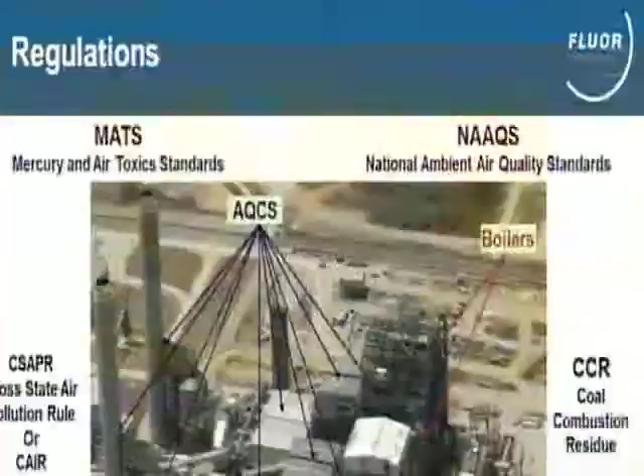I've spent 32 years in air quality control systems development. In a way, it reminds me of Lord of the Rings. We've started down a path that started more than 40 years ago, before the Clean Air Act, and we've had our first major battle with SO2, and we've done a lot of work on sulfur dioxide to take it from old units that used to work on multiple small 100-megawatt plants to now 800-megawatt plants that handle the flue gas from 3 boilers, and the technology's grown. The second big battle was NOx on the large units that we've tackled, and China is just beginning to work on. England's trying to do SCRs, but they can't find the money. And our next great battle, I guess, is air toxics, and that's a part of my talk today. I won't mention who the evil one is, but there may or may not be one in this case.

This is a power plant that was built and has been in operation in Texas for about 5 years. It was permitted at that time, and that power plant, of course, could not meet the MATS limits today for mercury and particulate. That's one of the challenges we have when we start going into the technologies.

I really want to focus on new plants in my discussions here. But if you talk about a new plant and all the regulations, of course CSAPR has come and disappeared like a ghost would. Coal combustion residue is not necessarily an issue on a new plant because you would design the plant for that potential. Same with 316B - you would design your plant for that, so it would not be an issue on a new plant. But things like continuous improvement under national ambient air quality standards, greenhouse gas, and MATS certainly are issues.

For those of you who don't go to Texas to look at power plants, I just wanted to show you, these little things here are turbines - that's what makes electricity. These medium-sized things here are boilers, and everything else from here back is air quality control systems. This plant is equipped with mercury control, large bag houses, SCRs, and 80-foot diameter wet scrubbers, about 140 feet tall. So somewhere over here, I think that's a truck. This is 2x800, a very large plant. It's a reference, maybe a perspective that everybody doesn't get every day.

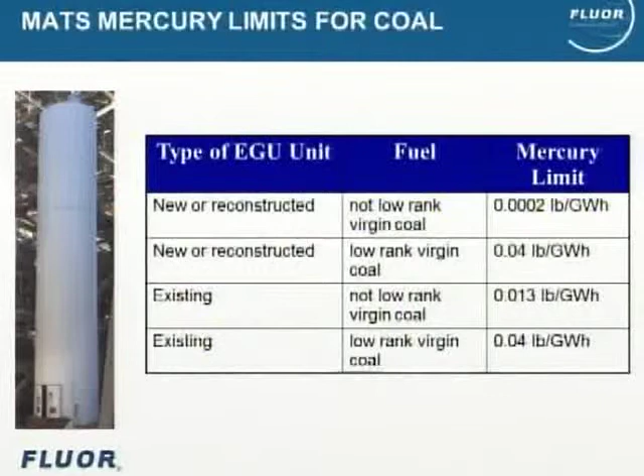We heard some very good talks about mercury, and we know that the limits for mercury on new plants are being revised. Those of us like me who have worked on some of the transition plants under the greenhouse gas laws - I testified under permit hearings, and it's quite an interesting process - but these limits are really a big challenge. For new or reconstructed units, I'm hoping the new limits are at least measurable, and can't wait to get those in the next few weeks, I guess, months. Maybe it's by February or March, I guess those limits will be published.

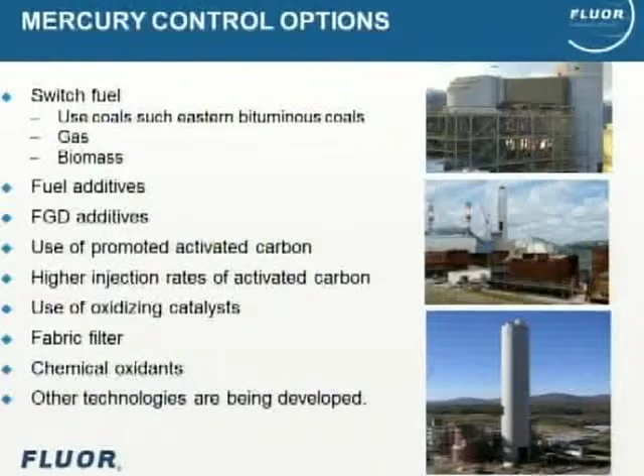We also heard a lot of things about mercury control options, and I don't know that I need to go into a lot more detail on that, but if you are building a new plant and you're meeting a limit that's anywhere close to where the MATS limits are today, you've got to do everything. I can't imagine that there's any way, because you're looking at 99.7% capture or something of that magnitude. And I think Forrest Gump's mother would say Mercury is as Mercury does, because it's a challenge.

We saw a very good presentation from Southern Company yesterday, and the similar sources that's in the regulation under MATS at their sites are not even similar sources. So to predict it, measure it, and guarantee it, you've got to do everything within the process. You've got to understand every variable - from gas temperature, the effects of SO3, the effect of NOx capture and ammonia, the removal, re-entrainment - every step of the way in the process.

And you've got to do that for every fuel that you may burn or that might show up one day, because of the variability of mercury in the fuel, the variability of halogens in the fuels - all things that are very important from a design standpoint. And when you're doing emission limits for mercury, we've gone as low as you can go. You can't get under that bar, especially when you consider startup, shutdown, transients, and all the issues involved with operation of a new plant.

Similar is the particulate control issue. Again, the bar is set very, very low. We do expect those limits to come up to be a little bit more reasonable.

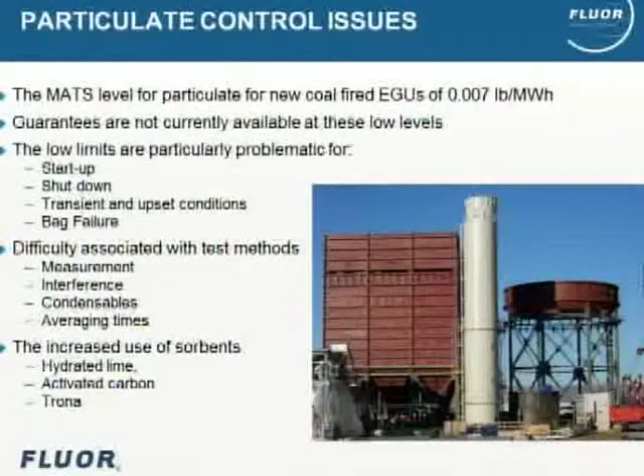And there's a bit of good news, I think, in the particulate control arena - people who sell bag houses feel like they can get to those limits under MATS, but they can't guarantee it. I can get there, but I can't guarantee it, because I don't know what's going to happen when a bag's going to tear, what's going to happen in the operation, what's going to happen with fuel variability.

What's going to happen with activated carbon injection and sorbent injection for SO3 controls. But from a conceptual standpoint, they can get down there, they could probably test it that way. But can you operate it at that really low level for a long period of time? That's certainly the challenge, and one of the major challenges for particulate control if and when new units are built.

And I think we could all debate what's going to be the future of new coal. But I would say that coal is a fuel that's going to be in our energy mix for a long period of time. A program to phase out old coal units and replace them with new coal units makes sense to me - maybe doesn't make sense to other people - but certainly near MATS limits and higher efficiencies, newer plants does make a lot of sense.

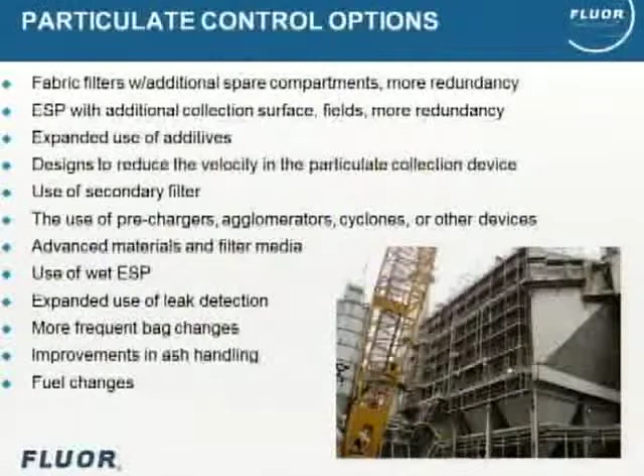Again, like in mercury, the options for particulate control at these really low levels includes doing everything and understanding the entire impact from combustion or selection of your fuel, your coal ash mix, the type of fuels, all the way through to the stack. And some of the new units that are permitted, that are transition units - even though the MATS limit says that wet ESP is too expensive - that's most likely part of the process to make sure that you can meet a particulate limit that is as low as these are under MATS today.

Switching tracks a little bit, there's been a lot of interest in control of HCl, and it's also part of MATS, or SO2 as a surrogate under MATS. And I just did a calculation that I wanted to share with you - it's a fairly straightforward calculation to look at the relevant reagent costs for control of SO2 and HCl using various reagents.

Limestone being a wet scrubber reagent, dry lime in a circulating dry scrubber or a wet scrubber, and then dry sorbent injection where you choose hydrated lime, trona, or even sodium bicarbonate. And the reason I did this calculation is because a lot of people say, well, this makes sense - I can control HCl or I can control SO2, and there's some pretty high removal efficiencies if you inject enough of this stuff in the gas path. But just from a reality check, look at what it costs you per ton of SO2. I've made assumptions on stoichiometries and the initial costs of the reagents.

A wet FGD, if you buy limestone at $15 a ton, costs about $25 per ton for SO2 removal. And as you go up for a dry FGD, circulating dry scrubbers, you're in the $63 to $137 a ton range. And dry sorbent injection, because you use a more reactive, more expensive material, can range from $158 to $994 a ton. This is just a snapshot of what happens for reagent costs.

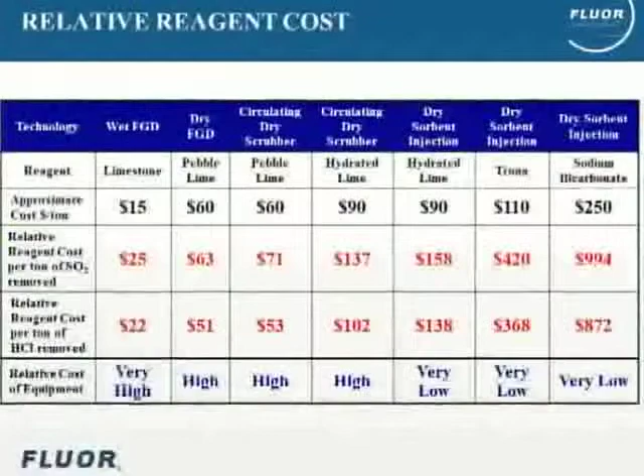Again, when you use these reagents, you've got to consider the impact of not only removing the acid gas, but what it does to the fly ash, what it does to the ESP if you have one, because it certainly will change the resistivity of the ash and the performance of an ESP, what happens in the fabric filter, and how removing these species might impact mercury control using activated carbon or other chemical additives. So it's very complicated, but this is just an example of the reagent costs, and I thought it would be of interest to this audience.

Measurement - I don't think I'll spend a lot of time on this, but most of us that work in this industry know that it's really difficult to measure some species. Mercury, if you take an uncontrolled unit, 800 megawatts, using a Powder River Basin coal, would emit about 1 pound of mercury a day. So you're going to control that to 99.7% and capture all that, and it's below the detection limit of reasonable methods.

Actually, HCl is the worst of the ones. The limits on HCl are below the detection limits, but mercury is really tough at the low concentrations. Particulate is really tough at the low concentration. It means longer averaging times, longer testing times. So it creates one of the challenges for the industry.

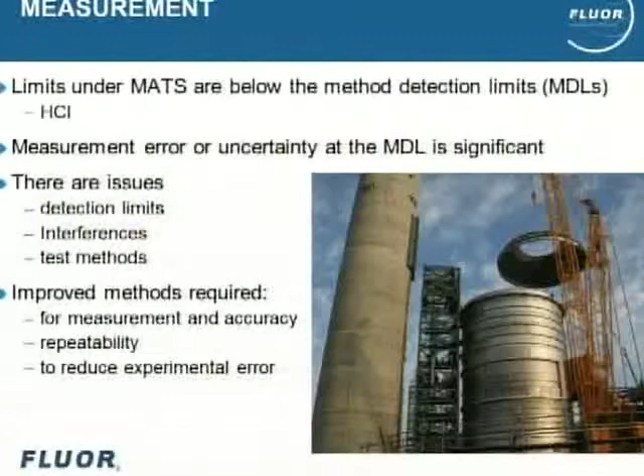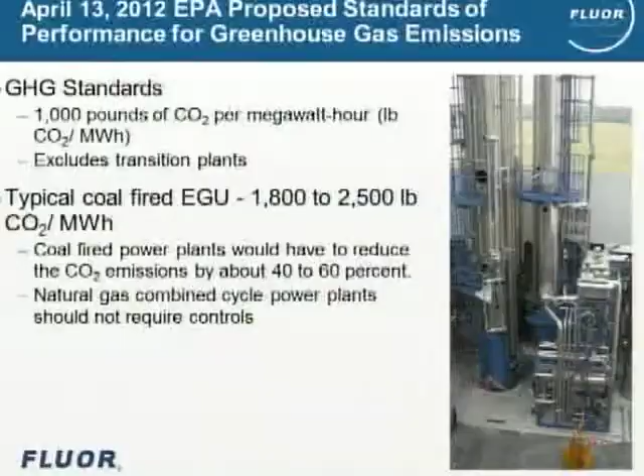Changing pace again - I'll spend the rest of the presentation on carbon dioxide capture. We've seen this just this morning, the elephant in the room. Greenhouse gas standards at 1,000 pounds of CO2 per megawatt hour means that a new coal-fired plant would have to remove 40 to 60%, probably closer to 60% for most of them. And that's a challenge amongst itself.

The basis of it is what a natural gas combined cycle unit can do, and I've questioned myself, like, where did that limit come from? Did people who sell gas decide that's where it ought to be? I don't understand it, but I do think that moving in the direction, based on a lot of things we've heard, of reducing CO2 emissions, with economic recovery, with load growth, when that begins to happen again, is going to be a challenge. And certainly greenhouse gas emissions for existing plants will be a greater challenge, and definitely for new plants.

What are the issues involved in CO2 capture? Number one, where can you go see a 500 megawatt CO2 capture plant attached to a coal-fired boiler? You can't. You can see demonstrations, you can see small units, but it hasn't been fully demonstrated. Now, the greenhouse gas rule does allow some time for this to happen, but that time is short in terms of the small number of transition plants and what will happen in the future with coal.

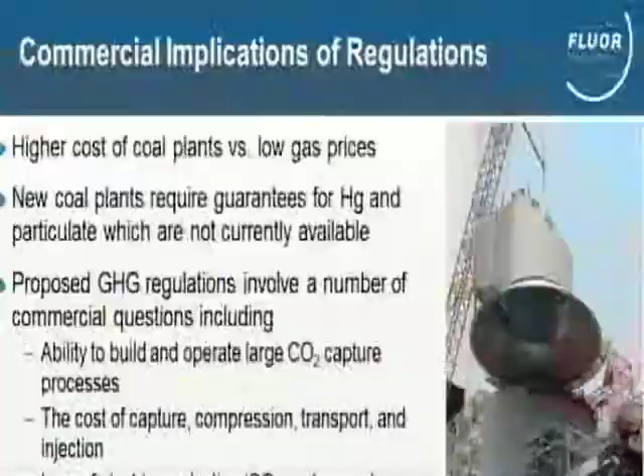Those of us who've worked in coal all of our lives like high-priced gas. But I do think that the choices have to be what makes sense, and we don't have enough data to know that gas prices will stay low as they have been this summer, and no confidence in that. So it makes those decisions very, very tough.

The guarantees around mercury and particulate are not only complicated from a technology standpoint, but complicated from how are you going to finance the plant if you don't have that guarantee, and where do you go to get that information? It's kind of a challenge in that we don't have the data.

For example, on mercury, most of the state laws and CAMR are kind of steered towards 90% capture, and that's where most of the data has been taken, at 90% capture. There's a lot of data that reports 97, 95, 98, but not day in and day out. So we haven't built the plant that makes the MATS limits, and we can't get the data until we have a plant that's built that makes the MATS limits. So getting there from a commercial standpoint is a large challenge.

Greenhouse gas regulations have a whole other set of commercial issues. You've got to be able to build it, you've got to be able to capture it. How are you going to run it? What happens when the CO2 plant's down relative to carbon capture? It means you probably have to over-design so that you do averaging, and you've got to have that in your permit. Just on and on, you're losing power production.

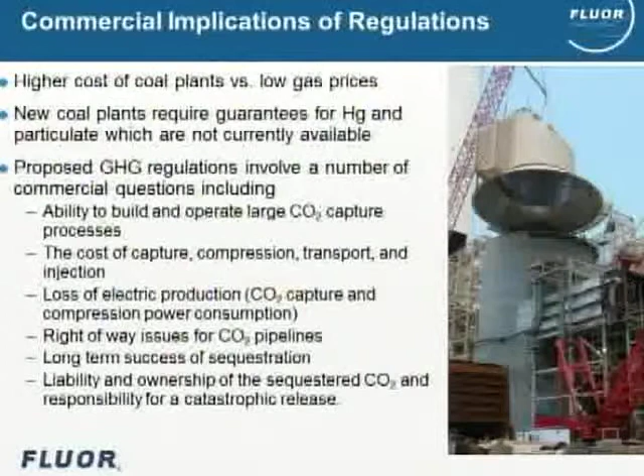It's somewhere between, you hear numbers as low as 15%. I think it's really in the low to mid-20s, or maybe as high as 30% parasitic power.

If you're capturing 90%, compressing it and sending it down a pipeline a reasonable distance, if that pipeline is 80 or 90 miles, you're going to add even more power, because that's a big cost of the energy of putting it down the pipe. Most of us know that the CO2 captured at these plants will have to leave on a pipeline, so you have commercial issues with ownership of the pipeline, maintaining the pipeline, right-of-way issues I really don't get involved with, and liability issues with CO2 long-term storage.

We just really don't know what happens. It makes sense because we store natural gas the way CO2 would be stored, so you can do it, but natural gas isn't necessarily the same chemical. Natural gas, when it leaks, is lighter than air. CO2, of course, is not. Everything that breathes air in the valley when we have a leak will wish they were not air breathing, or I guess it won't matter to them.

This is just a perspective. Fluor did a study for an 800 megawatt power plant. This is actually one of the transition plants that had CO2 capture in it.

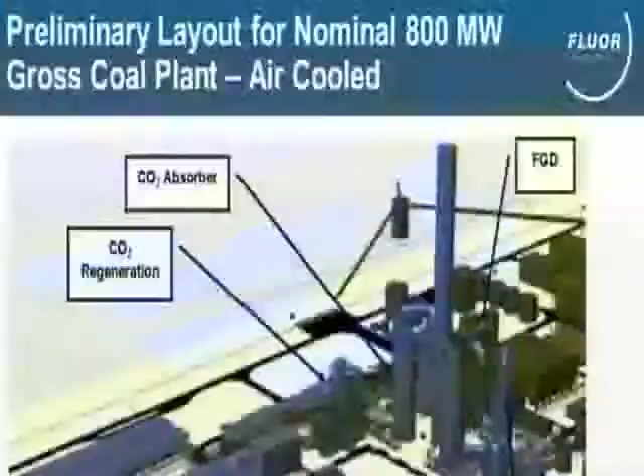So you can see the impact on a plant. This is a new plant. If you tried to retrofit this on an existing plant, like some of them we build SCRs and wet scrubbers on that have the Ohio River back there, you just won't be able to get that to happen. And if this plant happened to be close to a location for enhanced oil recovery where they would tie into a pipeline if and when this was built, that's an advantage for this location—it's not an advantage you'd have other places in the country.

It's a lot of equipment that gets added in, and because of all this equipment and moving it out, part of what causes the penalty is the electrical loss of compression, but you also have energy penalties due to regenerating the solvent and reusing the solvent.

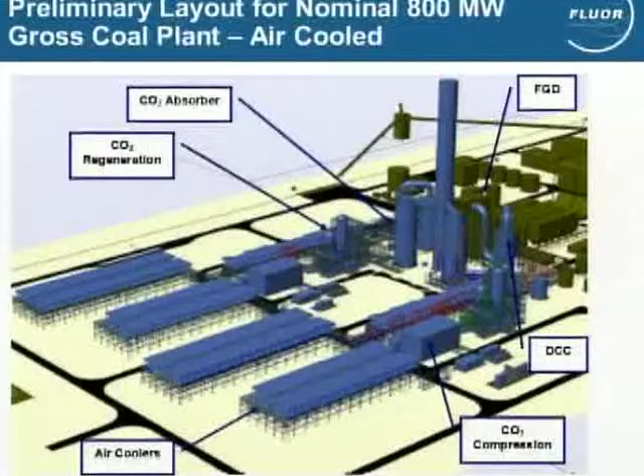Again, I thought this would be of interest—not everybody has seen what an 800 megawatt CO2 capture plant might look like. This is a plant, by the way, that Fluor has guaranteed CO2 capture removal on and has made a commercial offer for.

So what are the conclusions? Well, the future of coal-fired electric generation in the United States is uncertain. Have I heard that before? That probably goes without saying.

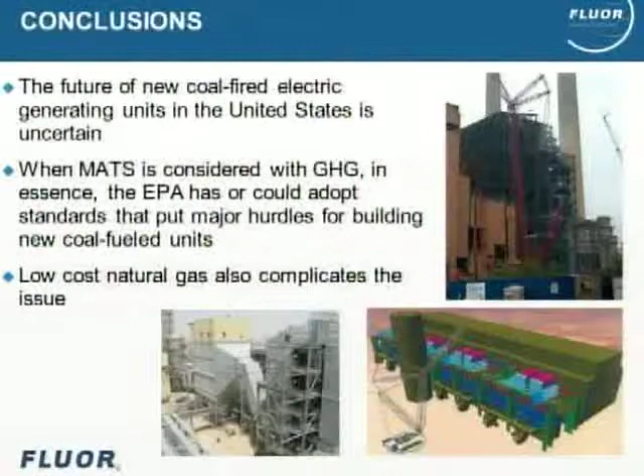I always think of coal as, if coal becomes diamond with enough pressure and enough time, and we certainly have so much pressure on coal right now, all we need is the time to figure it out, and maybe it can still be the diamond. I heard today there's other uses, but really I think we're positioned in the United States with a large quantity of readily available natural gas. When we have a road, kind of like the Lord of the Rings, that we're headed from a regulation standpoint, we're just entering the gates of Mordor, but from an economic recovery standpoint, the road could be paved by making prudent decisions in the energy sector.

If coal is going to be phased out, let's not have a war on coal. Let's figure out a way to phase it out over a period of time that makes sense. If natural gas is the right fuel, let's move in that path. If nuclear is right, we've got to remove the barriers as an industry. And I know not many of us in this room can make those decisions, but I always sit back and say, well, let's do what makes sense.

MATs and greenhouse gases are a really large challenge. If greenhouse gas regulations become part of existing plants, it not only affects coal plants, similar to what's in the proposed regulations, but it affects a lot of other fuels, including simple cycle natural gas, because simple cycle natural gas would have to reduce CO2. So it's a lot of challenges in terms of what's happening.

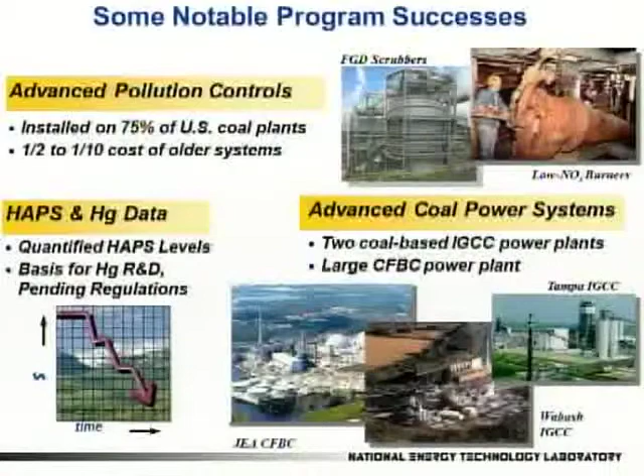And down on the bottom are 3 of our largest projects, which include the 2 operating IGCC plants in the United States. Next year there will be a 3rd when Duke's Edwardsport plant starts up. The department is not participating in that one. And also a large CFB at Jacksonville. These 3 projects were all pretty big in the construction phases, with construction maxing out or peaking probably in the neighborhood of 1,200 to 2,000 people on each of those 3 projects that are pictured in the lower right-hand corner.

We're no longer focused on acid rain, and all of our demos now have a requirement to do CCUS. That term was developed by the Assistant Secretary for Fossil Energy at DOE, Chuck McConnell. We arrived at that as a recognition that, even before the term came out, many early adopters would rely upon the economics proffered by enhanced oil recovery. But it's a recognition more of marketplace realities than a policy shift.

I'm going to go through these in segments. We have 3 IGCC projects that will do CO2 capture. None of the IGCC projects currently in operation capture CO2. The first one to do that will be Kemper County in 2014. Then we have 2 polygeneration plants and 1 post-combustion capture on an existing coal-fired unit. I'll also talk briefly about 3 industrial CCS projects that we have.

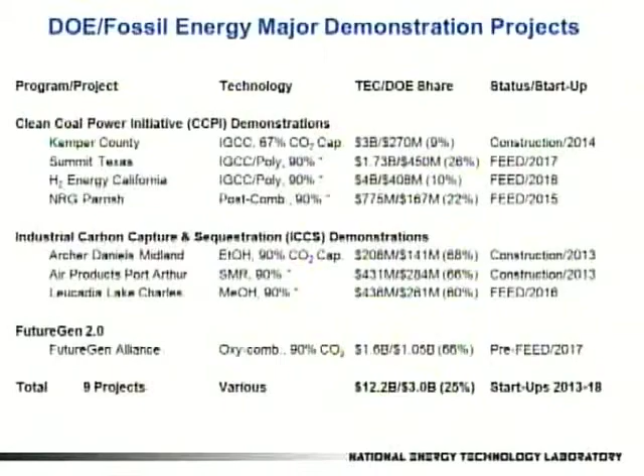The CO2 molecule doesn't really behave differently or care if it results from coal combustion, coal gasification, or some other industrial process. But we can still learn how to integrate processes, and when you look at the costs that come out of some of these industrial processes - certainly not all of them - the costs can be very attractive. Then I'll talk briefly about FutureGen, a project I've been working on since 2005.

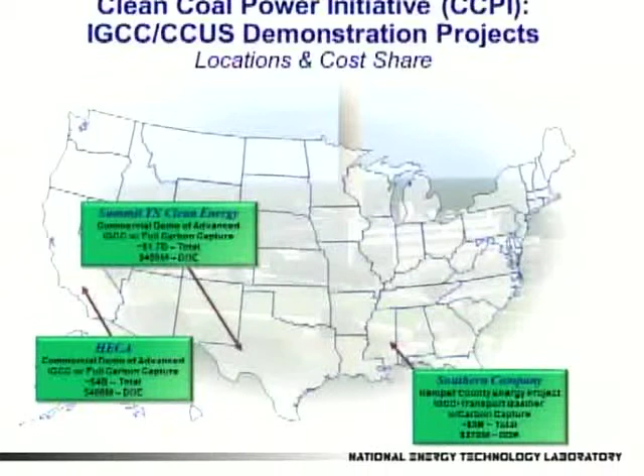The 3 IGCC projects are shown here with their costs. The DOE contributions are significant, but in every case they're dwarfed by what the private sector has to bring - we're simply providing a measure of assistance. A little more information on the processes, including the CO2 capture technology: at Kemper they'll be using Selexol, and Rectisol will be used at the Texas Clean Energy Project and the Hydrogen Energy California Project. All of them will feed the CO2 into enhanced oil recovery.

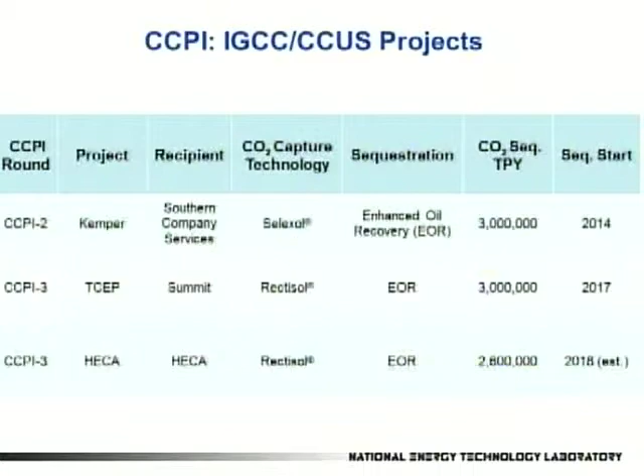The annual quantities of CO2 that will be stored are on the order of 2.5 to 3 million tons per year. As a former federal project manager, I focus on budgets and schedules a lot, and I know they change as you go through a project, so this is the latest information I have. Kemper County is going to be a...

2x2x1 IGCC configuration - 2 gasifiers, 2 combustion turbines, and 1 steam turbine - 582 megawatts net, including some duct firing on natural gas. It will capture, as Chris Hobson said earlier, approximately 70% of its CO2, which will be fed into CO2 pipelines for ultimate disposition in enhanced oil recovery applications. The project is really moving along.

Chris showed a photo before - it's a massive construction project. I mentioned the peaks on the earlier IGCCs; this one presently has 3,400 construction workers on site. It's a really big project, certainly an economic shot in the arm construction-wise, and in the future a reliable source of stable and clean energy for the people in east central Mississippi. Can't say enough good things about this project.

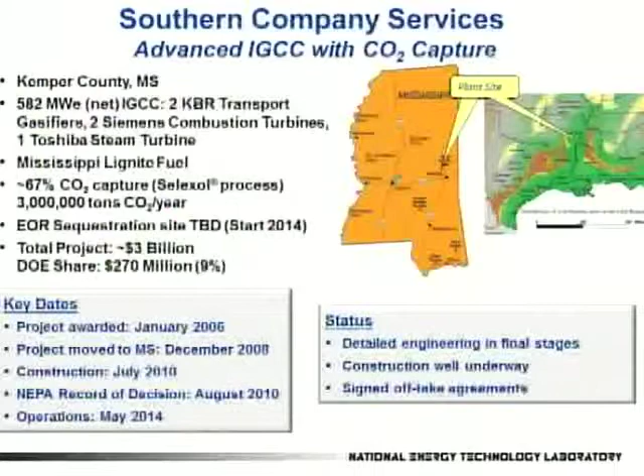We expect it to begin operations in mid-2014. All the offtake agreements are signed. The only other fact I'd point out is that this project is so large that they're sinking a new surface lignite mine in Mississippi. So the 3,400 jobs number doesn't include that, since the mine isn't really in our scope, but there's another fairly massive effort creating that new lignite mine to feed the plant.

I was asked last night how people structure projects. When you structure a big demo like this, it's not unusual for assembly of your project team to take 6 to 12 months. Typically you have a power plant or power company host, you may have a technology supplier - in some cases 3 or 4 technology suppliers - but usually one lead technology supplier.

You have an A&E or lead engineering company, and you could have other entities doing the financing. You don't just snap your fingers and wish that into place in 2 weeks or 2 months. By the time you run it through that many management chains with legal review and everything else, what I've seen is it's unusual to do that faster than 6 months.

And I was asked last night who should lead that. Well, from our perspective, it doesn't really matter. I've seen it managed well with the power company in the lead, like Southern Company, the example I just gave you. This is the 5th demonstration project Southern has done in our program, and they've managed them all very well. But technology companies can manage these projects equally well. We've dealt with literally all of them: Alstom, Foster Wheeler, Babcock and Wilcox, and those companies have the ability to lead a project as well.

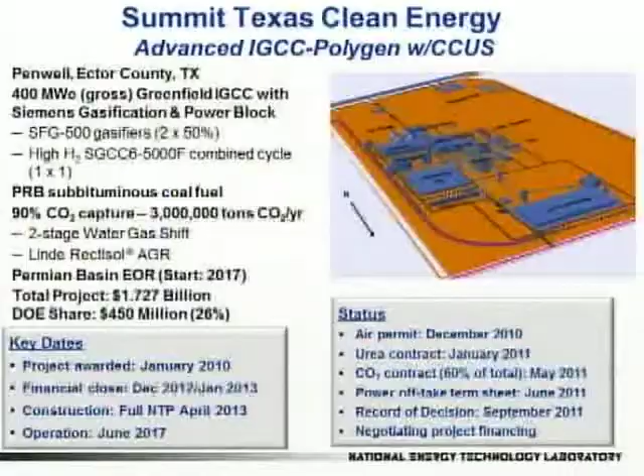Well, anyway, Summit has developed approximately $7 billion worth of natural gas combined cycle plants in the past, so they're experienced at that - they know how to do that. This is sort of a step up because an IGCC plant with carbon capture and polygeneration is certainly more complicated, a little more difficult, a heavier lift to finance and build than an NGCC.

This is going to use Siemens gasifiers and power block. It's sited at one of the Future Gen finalist sites near Odessa, Texas. It's a beautiful site - all of those candidate sites were.

Another important thing here is, coming from NETL, I'm a researcher, so the concept that's been rattling around the research community for years but never really gained commercial traction until this project hit the radar screen was one called polygeneration. It's had different names - we used to call it an energy plex. This is a plant that can produce, and at times back off a little bit on how much electricity it produces. At times it will produce more electricity, and at other times it will produce more urea or a chemical.

Let me be clear, this doesn't swing from 100% electricity to 100% urea, but it can shift the balance a little bit and track those two markets. If urea and fertilizer is bringing a high price on a particular day, well, guess what - the plant will produce a little bit more urea.

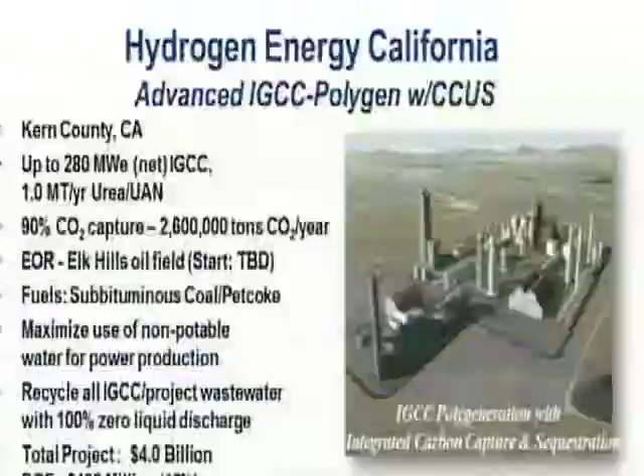Hydrogen Energy California is also going to follow the polygeneration concept. It's being led by another project development company called SCS Energy. They haven't built as many plants as Summit has, but the famous one that is always cited is the Astoria power plant that was built in New York City. So they have a track record as well, and they will be producing, again, a combination of electricity, urea, and CO2. The difference here is that while Summit will be base loaded all of the time, running max out those gasifiers - if you need less electricity, you send it to more urea - this one's going to be a little bit more of a load following plant.

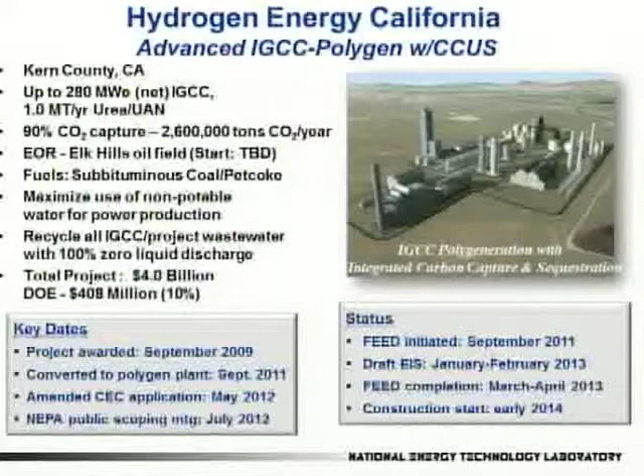A very big project, a little farther back - we're looking at a startup in the 2017-2018 timeframe. Both of these projects - Summit has completed FEED, HECA is in FEED - are both still pursuing financial close, and that's what we're trying to hold our breath, cross our fingers, and assist them in any way that we can to get them over the goal line.

The one project that we have in post-combustion is at NRG's Parish Station outside of Houston. I believe this is one of the largest fossil energy plants in the country. It has a number of natural gas-fired units as well as coal-fired units.

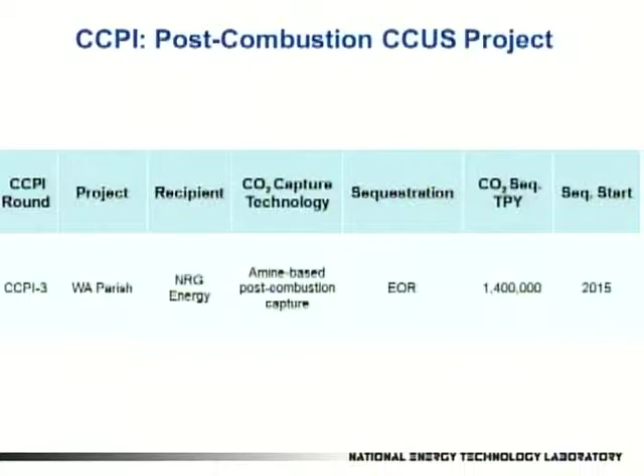Dennis just mentioned it's going to use an amine-based system, capturing 1.4 million tons of CO2 per year, again being fed into enhanced oil recovery.

When this project was proposed to us, it was proposed at 60 megawatts, and assembling the teams takes a lot of time, so you're kind of rushed when you have to submit an application into a DOE funding opportunity announcement.

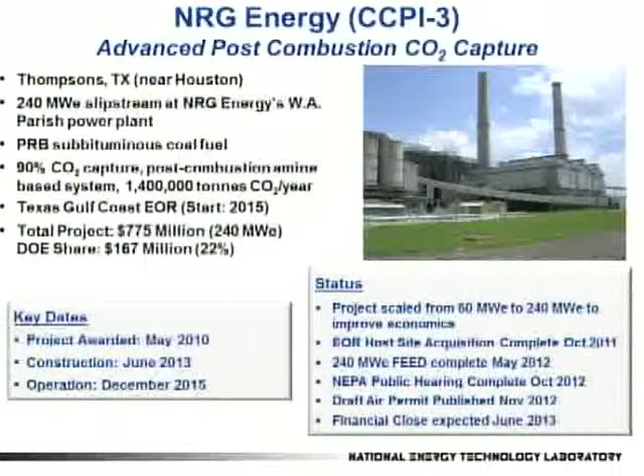We don't typically give 6 to 12 months for you to assemble your team and prepare things. So when they actually went out and started scoping oil fields suitable for this, the most suitable fields for enhanced oil recovery—sometimes called tertiary recovery—are those that have already undergone primary and secondary oil production, which would be water or steam flooding, with tertiary generally referring to CO2 flooding. So you're looking for a fairly mature oil field that has gone through the first two stages of development.

When they finally settled on an oil field, they found they really needed a lot more CO2 to pressurize it and produce the amount of oil they wanted. So they scaled the project up to 240 megawatts. They have completed the FEED, and it's currently under review at DOE—this part of the project hasn't been approved yet, but we expect to complete our decision at some point. Frankly, it will not move forward at 60 megawatts because there's no driver; there's not enough CO2 to supply that oil field. So we're evaluating it at 240 megawatts, and the revised cost is here—I believe this is the first time I've shown that revised project cost.

For the industrial sources, I'm not at liberty to give dollar figures for what it costs to produce CO2 from these facilities—it's proprietary in each instance. However, it's pretty cheap compared to taking it off a relatively dilute CO2 flue gas stream from a power plant. We refer to these as low-hanging fruit. We have three of them.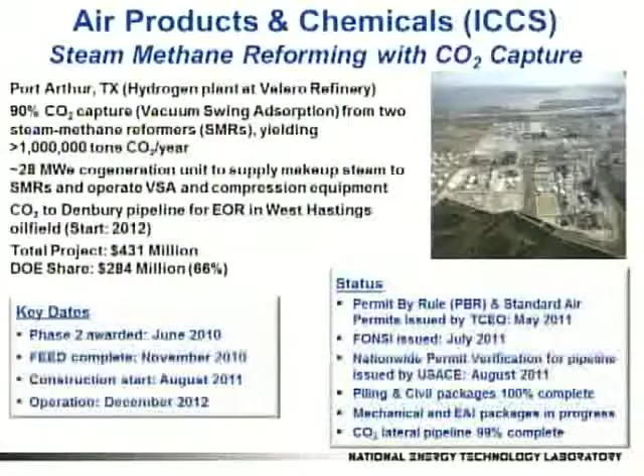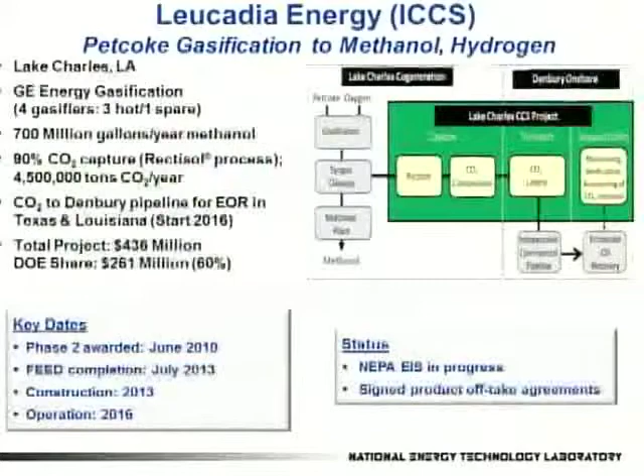ADM and Air Products are both in construction. As a project manager, construction is always a fun part of the project, so I can show you this. Leucadia is still looking for financial close, though they do have their offtake agreements, which is always a pretty key step toward financial close.

FutureGen—Dennis showed you the footprint of what it would take for an 800 megawatt carbon capture unit on a power plant, and we've learned that on FutureGen as well. FutureGen would be oxy-combustion, so our program actually has three planks: IGCC, post-combustion capture for the existing fleet, and oxy-combustion with FutureGen.

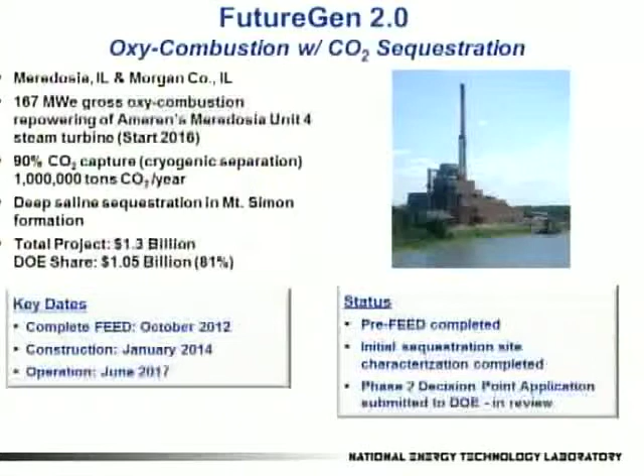Let me say that I don't really predict all 8 of these projects are going to be built, and I would resist trying to handicap which ones will make it across the finish line. In the first Clean Coal Technology Demonstration Program, we received a large number of proposals and ultimately selected 60 competitively for funding. Of those 60, we signed cooperative agreements with 50, and of those 50, 33 proceeded to completion. So I can't really predict which of these are going to make it there.

But what we try to do with each project is take it through stages so that even if a project doesn't go forward, we gain some knowledge from it. And we're gaining a lot of knowledge learning the steps—how do you find a site for carbon capture, or arguably more importantly, sequester the carbon in the ground?

How do you deal with the compression and transportation issues? How do you learn about the geology?

Let me say that if any of your companies, and Southern Company already knows this, builds and ultimately winds up operating an IGCC plant, it's a given that your company will become much more involved in chemical engineering than you are today. It's not to say you're not doing chemical engineering today, but at least a part of that plant will be a chemical process plant.

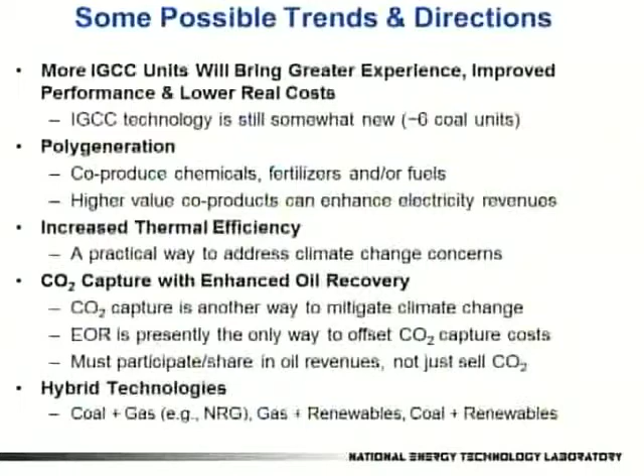Polygeneration, again, we in the research community and the academic communities have liked it for a long time. It will be wonderful to see it in commercial application, and to see it hopefully succeed in commercial application.

Enhanced oil recovery—we haven't talked a whole lot about geology here, but I use old numbers of, with advanced technology, 80 to 90 billion barrels of recoverable oil in the United States. I always ask people, crunch the numbers, please. The new estimate that came out of NETL ups that upper limit to 137 billion.

One of my bosses once came to me and asked, Tom, what do you think the price of oil is going to be 20 years from now? And I had to give him an answer. So what do you do? You guess. You look at what it is today—it's about $86 a barrel. And we'll have less oil. Is it unrealistic to think that it might be priced at $100 a barrel for the next 20 years, recognizing there's a high degree of price volatility there? Is that unrealistic? I don't think it is.

If you use that number on the numbers I just gave you for the amount of oil that we could produce, you're talking a 10 to 12 trillion dollar oil opportunity for the United States. And if you even crunch this a little farther—I know I'm going to be getting a little spacey here—

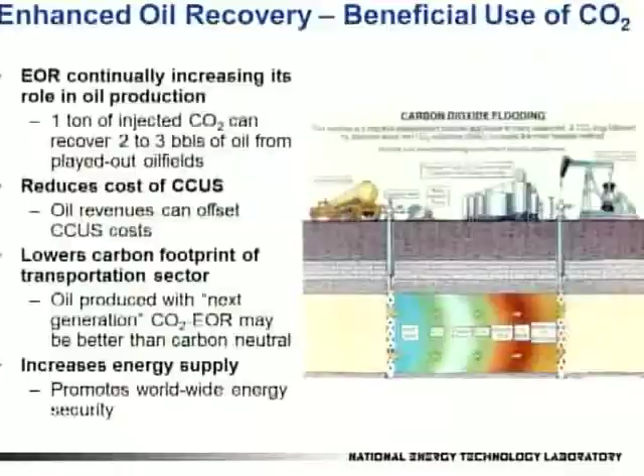the CO2 that's coming out of some of these plants, at 3 million tons a year, at $100... I haven't given you a data point. In West Texas, every ton of CO2 that's injected into the mature oil fields recovers over 3 barrels of oil. Over 3 barrels of oil for every ton of CO2.

Let's be conservative, let's take that down to 3 or 2. But they're getting over 3 barrels for every ton of CO2. So at $100 a barrel, you're getting $200 to $300 worth of oil. If you're cranking out 3 million tons of CO2 a year and feeding that into oil fields, you could produce 6 to 9 million barrels of oil per year and sell that for $100 a barrel. You could essentially pay for your plant.

Now, I throw that around to a lot of audiences like this, and I get, 'oh, but we're a regulated utility.' We need to start thinking out of the box as a nation as to how we solve this problem of CO2 emissions, and at the same time solve the problem that the oil industry can't get its hands on enough CO2.

So with that, I've probably overrun my time and appreciate your patience. If we don't have time for questions, I'm here to the end of the day. I think we have time for a question or two. Questions?

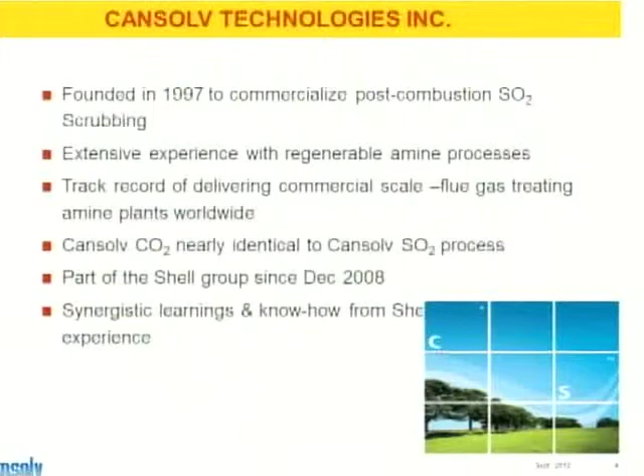We're actually the pioneers of using amines in oxidative environments. Amines have been used for 80 to 100 years in the oil and gas industry, of course, but that's primarily in cleaning gas streams that are non-oxidative because they're pre-combustion. So we took that, adapted it, and applied it as a retrofit on post-combustion. We have a track record of delivering these plants around the world and adapted the technology back basically to its natural fit, which is to capture CO2. SO2 is the same thing as CO2 for me, because I talk in pH and chemistry.

So we basically readapted the process, and we now offer two technologies, CO2 and SO2 capture. We've successfully commercialized the technology to the point where it became attractive to Shell Global Solutions, and in 2008 they purchased us. We're now a fully owned subsidiary of Shell. We still operate as an independent company, but fully owned by Shell, so I get the best of both worlds.

It also gives me synergistic learnings. That's a big one. Shell's involved in extracting oil, so EOR, as well as operating these type of plants around the world. And believe it or not, Shell's actually one of the biggest companies in the world investing in CO2 capture projects. They also deal with a whole lot of sulfur dioxide, so it fits really nicely. As I mentioned, we offer SO2 and CO2 technologies, and because they're almost identical, as I'll show you, we can integrate the two.

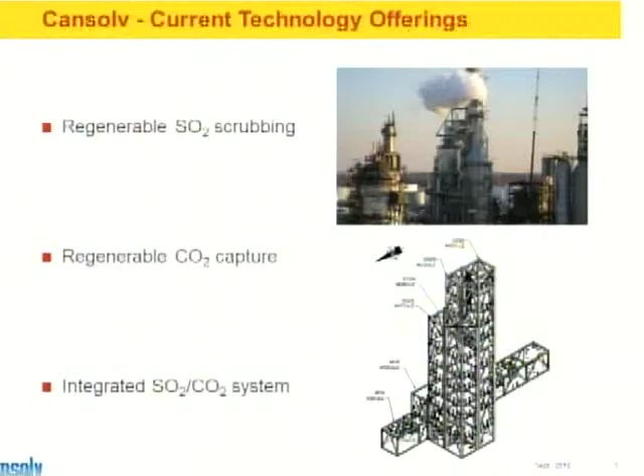We take this gas into the bottom of our absorber tower, which in this case, when talking SO2, needs to be wet, so we've got a pre-scrubber section that basically means you pour water on it and saturate the gas. Once it's saturated, it passes through into mass transfer packing and absorbs SO2. Liquid solvent is poured in the top of the tower and passes countercurrently against the hot rising flue gas. There's a chemical reaction, and the absorbent absorbs the SO2 and comes out the bottom of the tower, and it's pumped along to another section.

Out the top, you're going to have the removed SO2, so 99.99% removed if you want, or whatever your emission law requires. The amine, now loaded up with SO2, crosses a heat exchanger to recover some energy, then eventually transfers over to a stripper column. This is a column where the liquid is dumped in, and it flows down countercurrently against hot rising steam. That steam serves to liberate the bond that was created, so the pure SO2 is released, and the solvent is now empty - we call that lean - and it's used again over and over, hence regenerable technology.

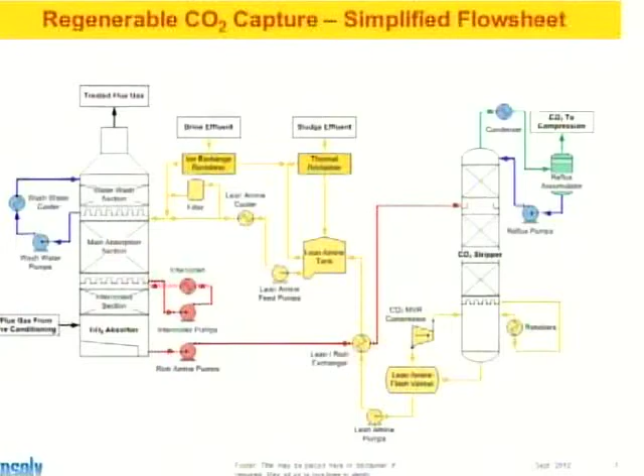That creates heat in the system. We don't like that - we want to cool it down and maintain a uniform temperature. But other than that, basically the same thing. For CO2 stripping, we use steam, which liberates the CO2, and this goes off to compression and eventually, hopefully, EOR or to a saline aquifer for sequestration. So in a very quick, simplified summary, that's the technology.

If you have any questions on that, you can run through and either catch me after or ask me. But this is a quick example of some of the things we've done. Our biggest flagship project right now is the SaskPower project.

in Canada. This is a 150 megawatt integrated CO2 capture system. It's in construction right now. You can see this is actually quite old - I've got a better one coming up. But I think right now it's the largest in the world in construction on post-combustion.

A lot of others, as Tom mentioned, have reached FEED, but are waiting for that FID, final investment decision. These guys have made it, so they're pioneers themselves, and we're happy to come along with them. Here it's 1 million tons a year, full 90% capture. It's a fully guaranteed plant, which means it will deliver the CO2 for EOR, which is required by contract.

They've also done a smart thing, which is develop an alternate CO2 sequestration point. On site, they have an area to sequester CO2 in case the EOR contracts either go belly up or they choose to capture more CO2 than they have a contract for. I was actually in Saskatchewan when they reached 2,500 meters of drilling for the site, which is the deepest hole in Canada, I think, right now.

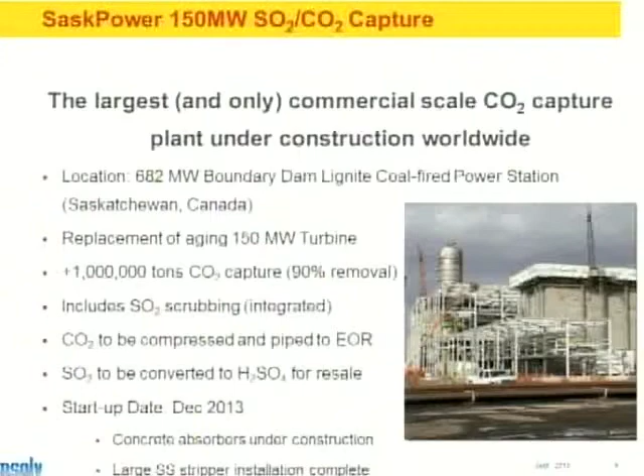The SO2 is actually going to be removed using our technology, converted to sulfuric acid, and sold into the local fertilizer market. As you can see here, this is actually the base of the tower. It's going to be built out of concrete, and it's 180 feet tall. It's actually 80 by 80, or 75 by 75, by 180. So we're talking a huge, huge tower.

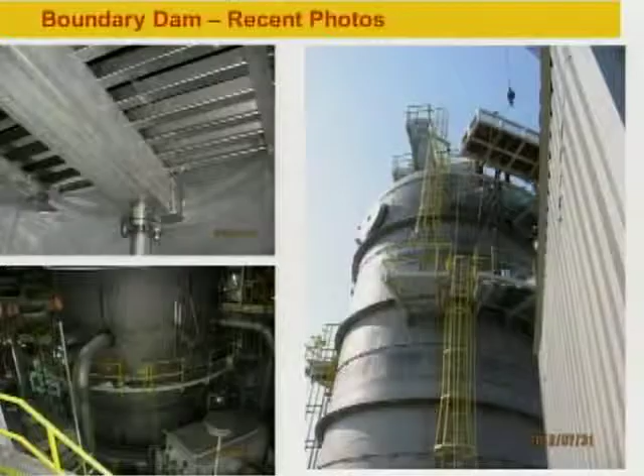There's some recent towers as well. This is an 8-meter diameter stainless steel tower. We brought this in on a truck, so it was a big truck, but it was modularized, believe it or not, fully installed. You might recognize this equipment if you've been in any chemical plants at all. They're called steam reboilers. These are the biggest ones they make. There's 5 of them around this, so this is a big plant.

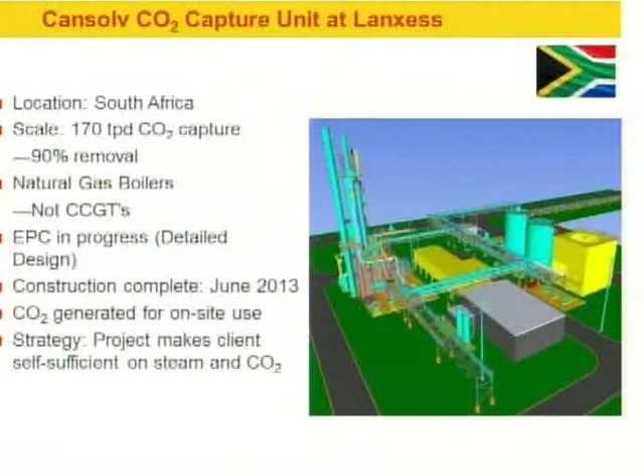Another project we're working on in construction right now is a CO2 capture plant in South Africa. This would be qualified as CCUS because it's for utilization. They actually need the CO2, so they're building a plant to basically make steam with the natural gas and then capture the CO2 for their own process.

A demonstration plant that's currently started up in Aberthaw. This is basically a plant we built entirely in China and shipped to them, and they installed it. The entire reason for this plant, part 1, is to demonstrate the ability to load follow in the UK. In the UK, coal plants go up and down overnight, and we want to prove our plant can follow that load. Part 2, the second year, we're demonstrating our new and improved solvent at 3 megawatt scale, which is the size of this plant.

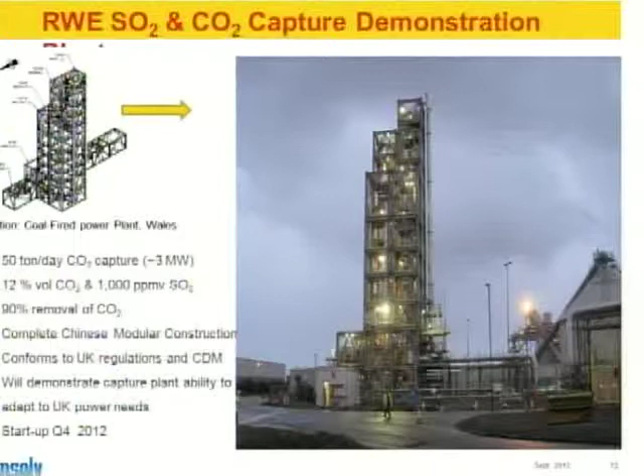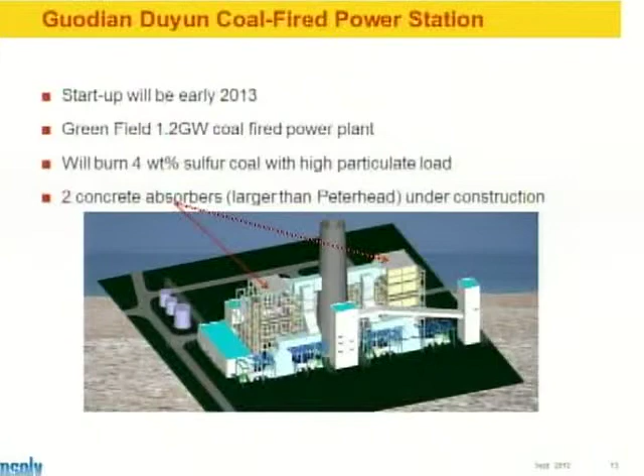Some other experience, I don't want to spend too much time on here. This is a 1.2 gigawatt coal plant in China. This is SO2, not CO2 capture, but it just shows... this is the tower in construction. Again, concrete. So we have a lot of experience now building huge vessels that are packed, stainless steel packing inside. This is 22 meters, and this is one of 2 trains. So these are just gigantic scale towers that we're building, which is what's going to be required for CO2 capture.

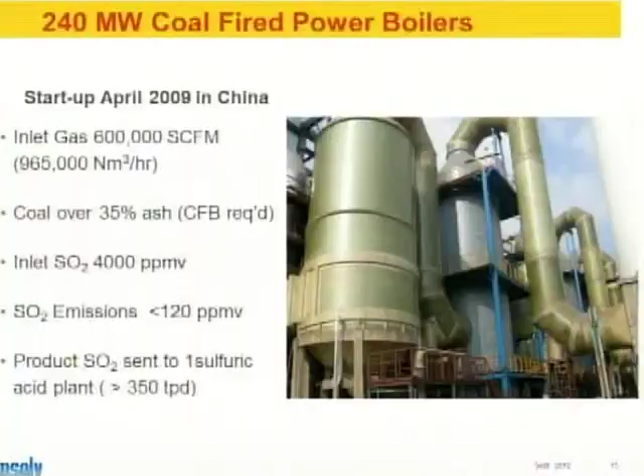All right, so let's get into the meat of the presentation. Key challenges. Now, before I get into this, I should probably give a disclaimer. I am not, nor do I play on TV, a project execution expert for EPC projects. Maybe Dennis from Fluor is actually better to talk to than I am, but this is just my personal opinion based on projects that I've seen go through to success and some that have been canceled, and maybe based on those reasons how we could adapt the models that we're so used to using.

So if I consider the whole system a jigsaw puzzle, there's different pieces, right? Safety - we really need to confirm at all costs that the thing is safe. Is it going to perform? Are we going to reach the guarantees? How much does it cost? What about scale up? You're going from, as you saw, a dinky little plant to a giant one. What's the OPEX? How much electricity is left going to the grid? How do we handle liability? I'm a technology provider, I give you some performance guarantees based on my license - what's that? It's less than 1% of your project. How does that help? Degradation products, so they're not even classified.

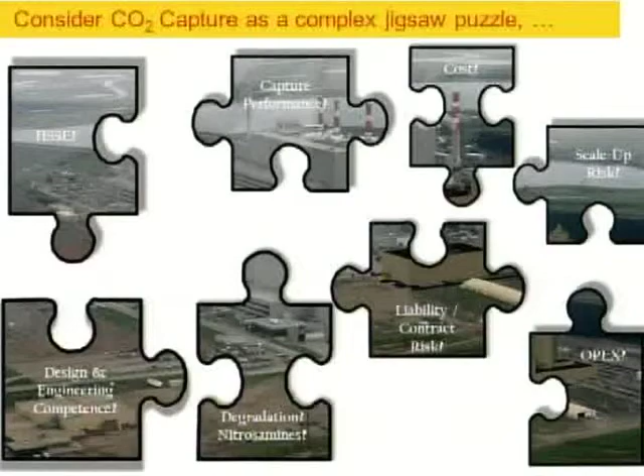How do you regulate those? EPC, et cetera—just a whole lot of unknowns.

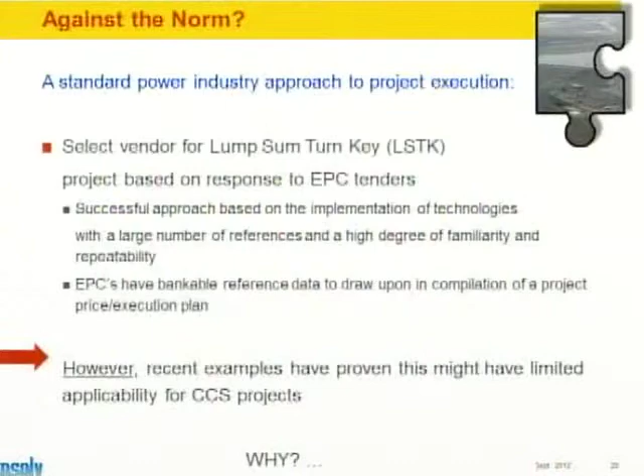So if I give you an example of a standard approach to project execution that probably most of you are familiar with, you'd probably agree that one way forward is to select an EPC on a lump sum turnkey basis, send out a tender to individual EPCs, evaluate the quotations. EPCs use their available data, provide a firm quote on a lump sum, reimbursable, or convertible price, whatever it may be, and they stand by their price. Then you select based on your own criteria. Recent examples in CCS, though, have shown that this approach doesn't seem to be applicable.

So I want to explain why. There's a few challenges that could potentially describe why.

Number one, I'm going to call technology—it's what I just described, what everyone else described. These technologies are all proven. It's easy stuff, but they're capex intensive, extremely large, and take a lot of OpEx. We talked about this in our workshop roundtable discussion as well, many times.

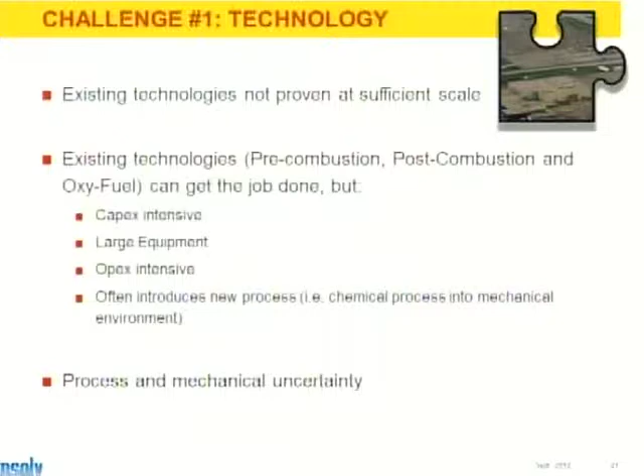Tom just mentioned it again: you're taking mechanical engineers that want to put electrons to the grid, and you're converting them into chemical engineers basically, giving them a chemical process. This is new to everybody, so you've basically introduced uncertainty.

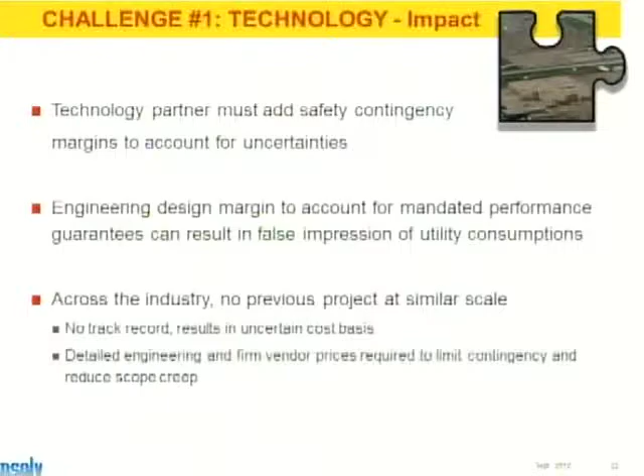The impact is the technology partner has to add contingency to account for their own uncertainties. The engineering design has to add margin. The industry has no experience at that scale. So if there's no track record and no detailed engineering, the cost goes up, contingency goes way up, and scope creep happens. Either you end up with a price too small that gets higher, or a price too high and you can't go anywhere anyway.

What's another challenge? EPC price. Let's take a look at how we get to an EPC price. Again, I'm not an expert, but usually you've got a bank of engineering data based on previous projects, a whole bank of costs that you use, relevant projects, and warranty performance history that you can base your guarantees on. That comes together with your lump sum or convertible price.

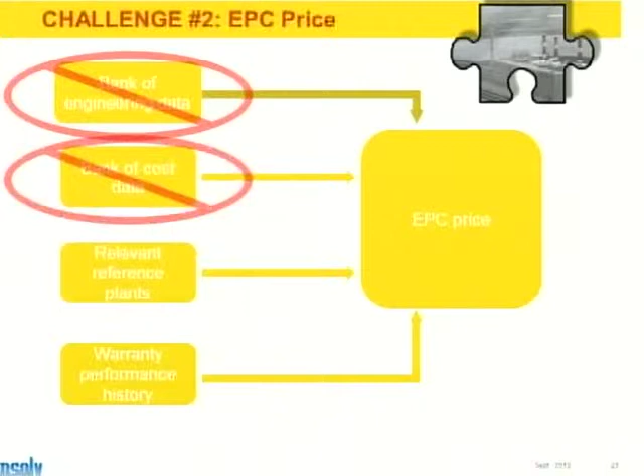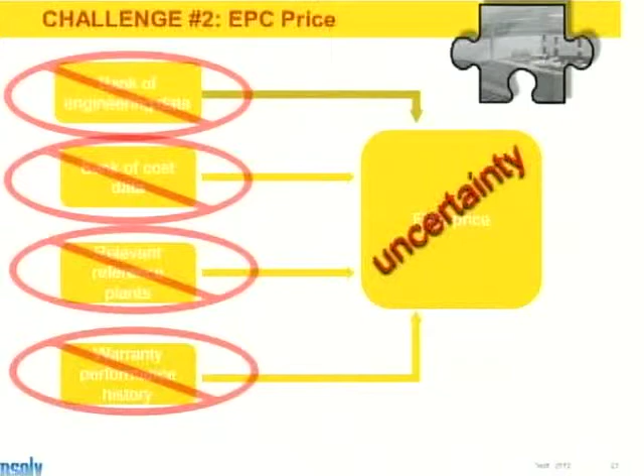We don't have any data here, so we're left with the others, but we don't have any cost. There's no reference plants, and no reference plants means there's no warranty data. So basically we're left with complete uncertainty when it comes to an EPC price. That's another challenge that's a little tough to overcome.

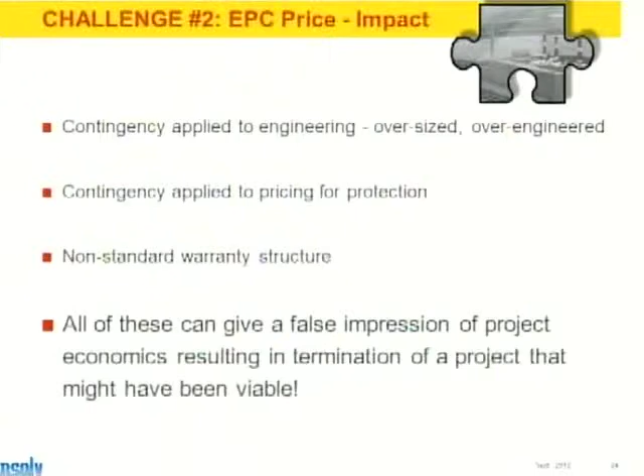So the impact is, of course, contingencies are applied. You oversize, you over-engineer. The warranty structure that I want to provide as a technology provider doesn't suit what you want, because you want the EPC to link the warranties to his price. This often gives a completely false impression of the real economics of a plant.

So the third challenge would be the contracting strategy. Again, this is linked to the other two, of course. So it's difficult to take an approach that works. Let's say a standard approach for lump sum turnkey would look something like this.

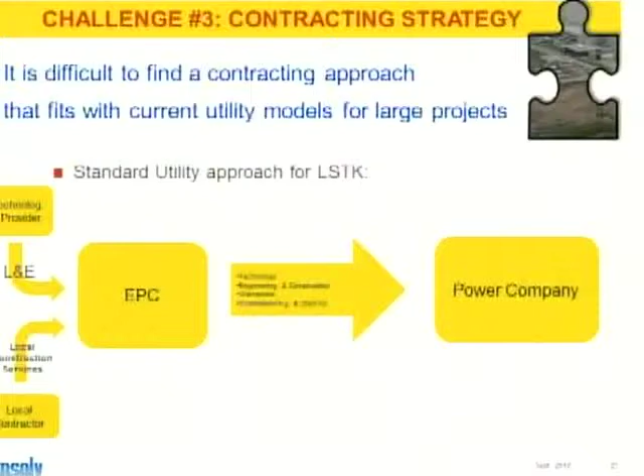A technology provider and a local contractor go into the EPC—he wraps them all up nicely and goes to a power company. But my approach is I want to contract directly with the end user and give him a license to do all this stuff. He hands him a BDP that I've given him, and I give him some warranties based on him building it properly. If he doesn't build it the way I told him he should, well then it's not my problem.

So you can see there's a bit of a link here, and the link creates risk. Obviously that creates cost and scope creep, which kills projects. So the impact results in confusion, complication. There's no line of approach, no single point of contact—that's finger pointing, and we're good at that.

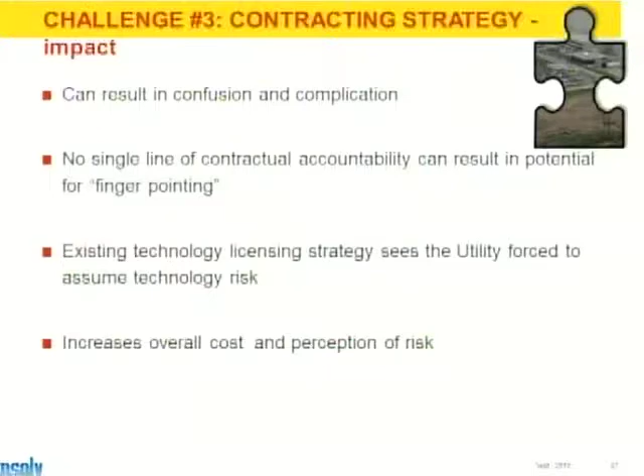And basically the licensing strategy sees the power company has to take on all that risk. First of all, that's always going to be the case—the end user always takes on most of the risk. But we need to somehow create a model that sees some of that risk sharing. So the end result is a big-time perception of risk.

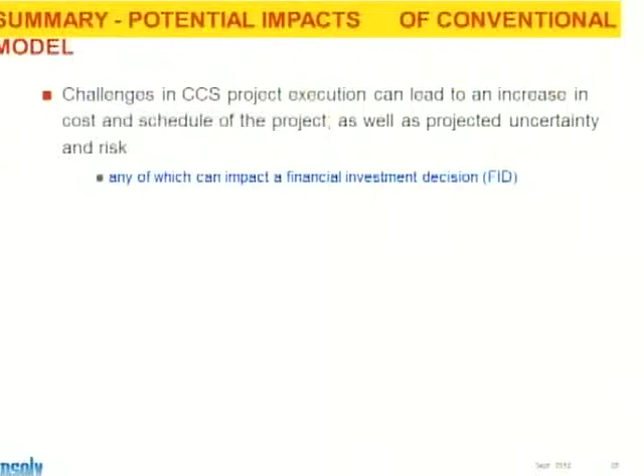So here's a potential impact—there's two impacts that I think you could fall under either one of. Number one is termination before you ever make your financial investment decision. So what could happen is during the pre-feed determination, the price is way up here, way off the charts, it doesn't match any of your economic models, you cancel the project, and you're happy that you didn't waste your money.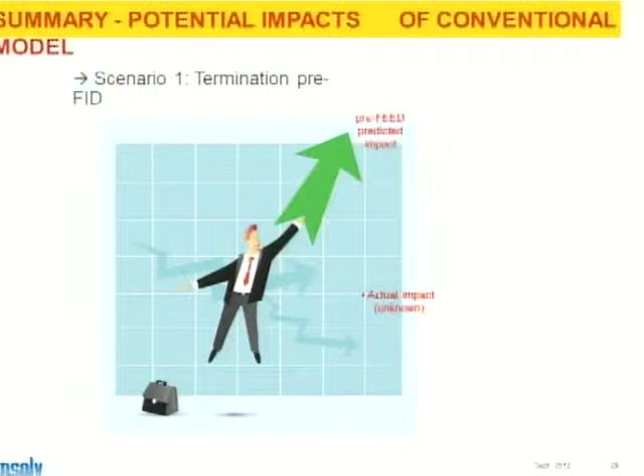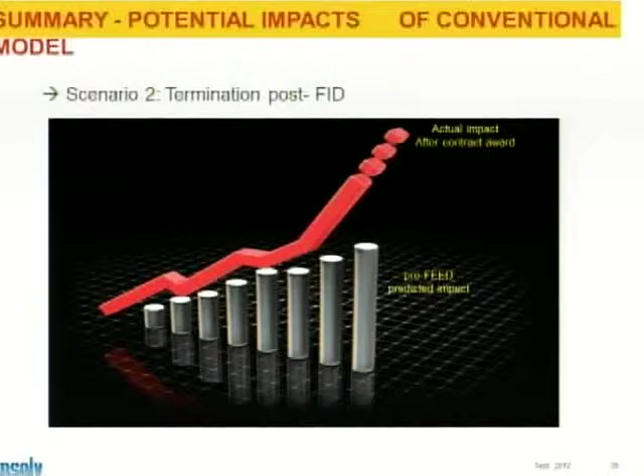Another potential impact would be post-FID, and again this is probably much worse because you've already made your investment. This is what usually makes the pre-FID cancellation happen, the fear of this. So you have your pre-FEED predicted impact down here, everything lines up nicely, and your EPC gives you this number here. But once the project kicks off, you find yourself way up here and it's not sustainable anymore, so the project dies. That basically means you might have canceled a project that had a viable life for no reason.

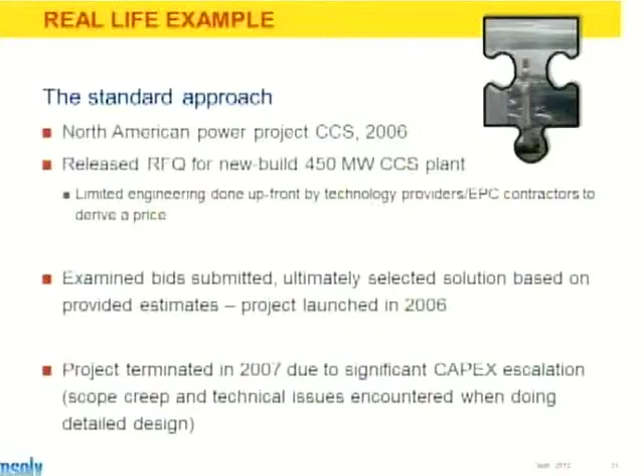So I want to provide some real-life examples, or one anyway. Here's the standard approach: a project in North America—most of these projects have been in either North America or Europe. This was in 2006. They released an RFQ for a new build, 450 megawatt CCS plant. They did their research, and this was an extremely well-educated client as well, so they knew a lot. They had their owner's engineer to support them, but they had done limited engineering up front because they were limited in cost.

So they examined their bids in detail and selected their approach. In this case, it was oxy-fuel that they went for, and they launched the project go-ahead in 2006 because it met their expectations. In 2007, the project was completely canceled after FID due to a huge CapEx increase, because the engineering that wasn't done up front was done here and revealed this was actually not the case. The scope creep and cost creep killed the project.

So what could be an alternative approach? I don't really need to define FEED for you guys, but it basically gives you a chance to mitigate these unknowns, and it's a fairly common practice to even do a FEED before you go into an EPC tender. But what's new here that I'm proposing is a multiple competitive FEED procedure. That's the approach.

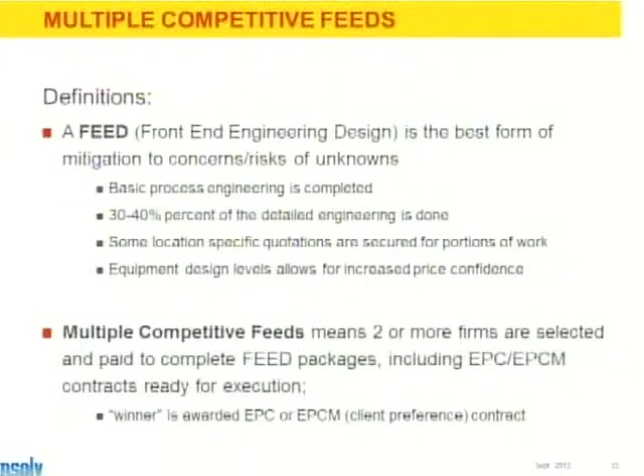It basically means you take at least two, maybe three or four—the more the better, though of course it gets more expensive. You take firms and have them selected to do paid, complete FEED definitions, which includes your EPC tender. So you basically get a bankable number from whoever this proponent is, and the proponent usually ends up being either one party or a team, a consortium. But what you're getting from them is a full FEED development as well as a bankable EPC price.

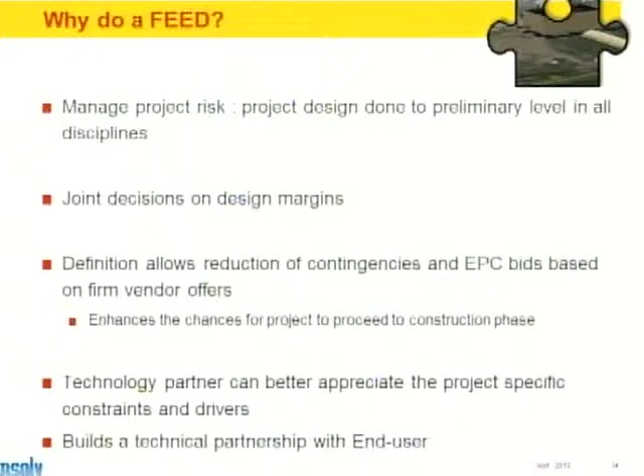So why do you do this? Not only do you manage your risks because you're doing the engineering up front, but you're also allowing the client to be involved in margins, which is managing your own risk because you have to put a number on the table and internally decide your own margins. If the client is paying for the development, he gets to be involved in what margins go where. And it allows a partnership to be built between the EPC and the end user directly. All that helps in making for a better, at least clearer understanding of a project.

Now, why would you do multiple FEEDs? Of course, project pricing without a FEED results in overinflated offers. Even if you do a FEED, first of all, if you do a FEED and then ask a different EPC to build it, you have the chance that more finger-pointing happens because 'I didn't do the FEED, but I'm going strictly on what this FEED says.' But again, you could potentially end up in the same situation where the EPC contractor takes the FEED, gives you a price based on his understanding of that FEED, and you select it going forward, and you end up with a project that doesn't match expectations.

This multiple FEED approach allows two or three parties to compete in a very competitive playing field, because you're paying them for the work they're putting in. They're performing the engineering up to, say, 30%, and tailoring their offering to you, so it's an apple-to-apple comparison. The other biggest problem is that EPCs give all their own understandings and quotations, and they're all different, so the utility has to decide what means what and how to level the playing field. This multiple FEED allows for that type of elimination—all those contingencies come off the table.

So what it can do is, yes, it increases your costs up front because you have to pay for 2 or 3 potential feeds, which doubles or triples those costs. But it lowers the overall engineering cost because of a competitive environment. You're sharpening the pencils of the people at the table. If they had too much contingency because they don't feel comfortable, they might lose the job. So you're going to see the best possible price from every party because they're interested in getting that job.

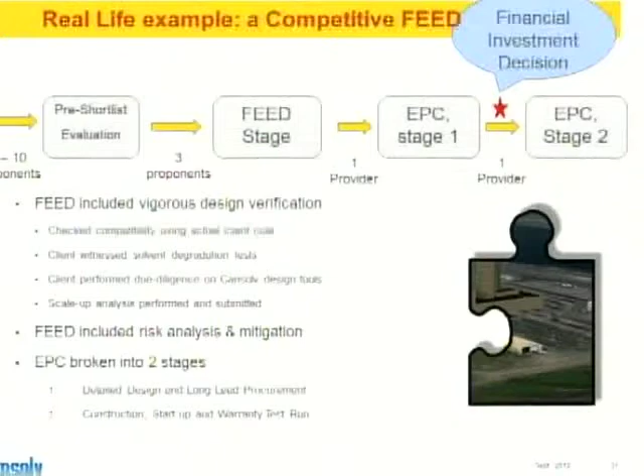So this is exactly what happened, and in the feed, the risk analysis and all the mitigations are taken into that cost, and then you go forward. In this particular case, the project did go forward, and I think I have an example of exactly that.

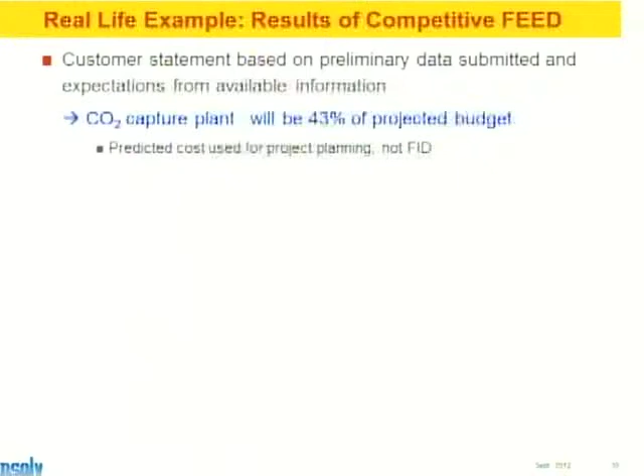So the expectations, based on public information available before the project started, were that the capture plant was going to be about 43% of the projected budget. This is based on information from EPCs as well as capture providers that you get for free in proposals. The actual lump sum turnkey price, a bankable price, with the project almost finished construction, turns out to be only 35%. If you look at that gap right there, you more than paid for your multiple feeds.

So you've got all your money back and then some, and you've got a more efficient project. On top of that, the OPEX savings is actually a 30% improvement versus the expectations the utility had in mind before the project started.

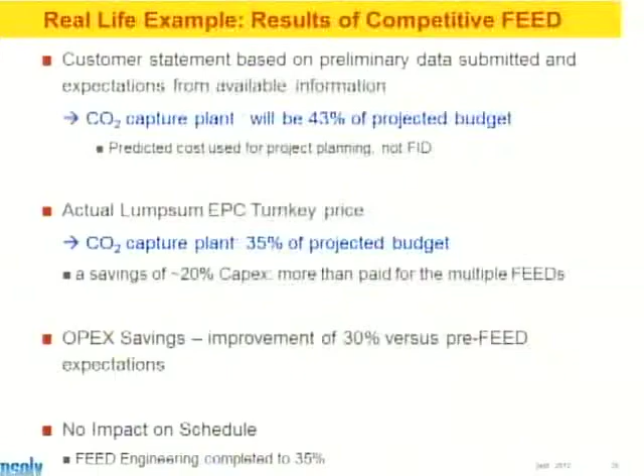So there's no impact on schedule. The feed engineering was completed up to 35%, and then the detailed design started at 35.1 and went forward. So no schedule slip there.

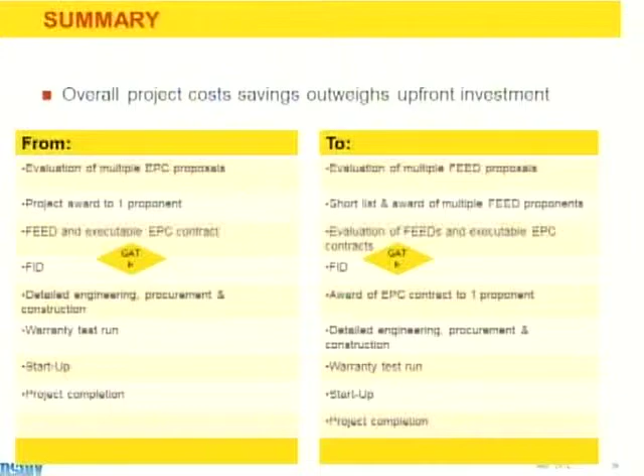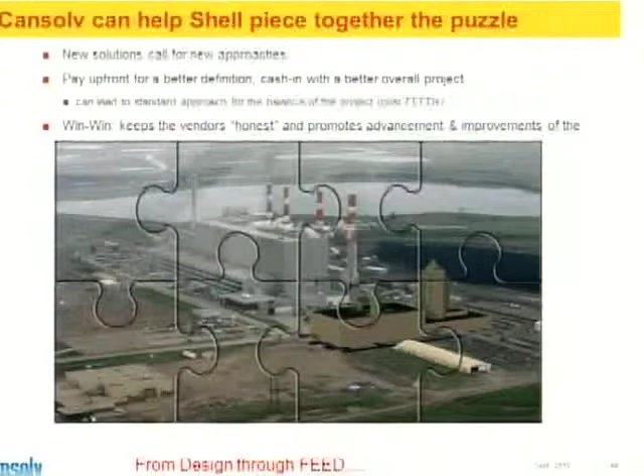So, new solutions call for new approaches. This is basically a conclusion: it's a win-win, I think, because it keeps EPCs and technology vendors honest, but also allows you to improve not only your understanding but your risk management. And if you can mitigate risk, you have the chance of taking a project from a design stage to potentially a construction phase, which is what this project is now.

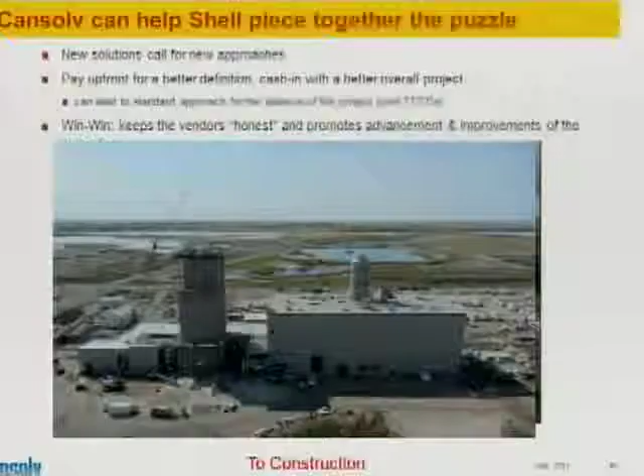You can see here it's 180 feet tall, SO2 and CO2 in full construction. Compression is over here, you can't see it yet, but this will be started up early next year. Actually, the end of 2013 is the startup date, with full operation by 2014.

So I think with that, I tried to rush as much as I could.

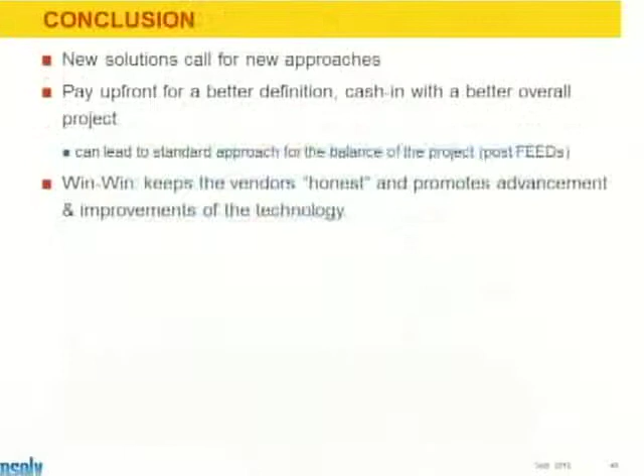And I'll take any questions you may have. Questions? I think you're competing with the break. Very good. Thanks. Thank you.